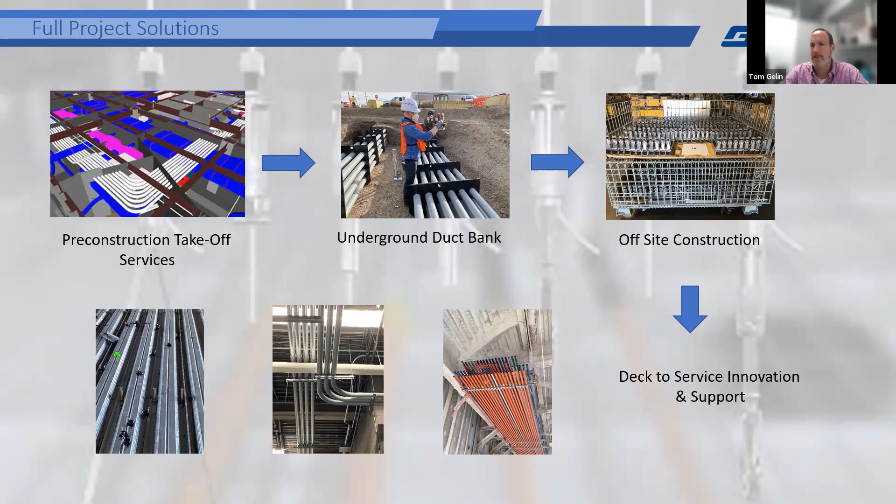How much time does the contractor need for us to be able to turn this around? So when we take a look at that, what we're asking for is your shop drawings. As that design comes through for you guys, and as you're building this process, we can help you with linear foot — we can do bare bones quotes from linear foot, but we do need to talk a little bit about structure. We can get into a 5 to 10 minute conversation about that and walk it through, or we can send those shop drawings in to our team in Chicago, and they can walk through an entire BOM for you and lay it out. As you see up here, everything is color coordinated — each part code for the BOM is color coordinated, then it's laid out on your drawings as well.

So we'll overlay that into what you guys have laid out and designed. It's zone specific. We can also work on delivery schedules for you, so we're shipping just in time rather than dealing with having to stock or hold product. We can deliver just in time rather than having to find a place to put it, because these sites are not getting any bigger. They keep getting smaller and smaller, just like your mechanical spaces. So that's one avenue we provide on that side.

We'll help with the technical side. Go ahead, Tom. It was just more of a comment that this service is available to all of our customers, electrical contractor, mechanical contractor, piping contractor. And I've been surprised at the reception so far that it hasn't been greater. So maybe some of the electrical contractors here will take advantage of it.

One thing that maybe we're not touting enough is that the takeoff service we provide doesn't cost the contractor a thing. That's a free service we provide for looking at the product and the process we're putting together through Gripple. So it's a no-cost takeoff service that's available to you.

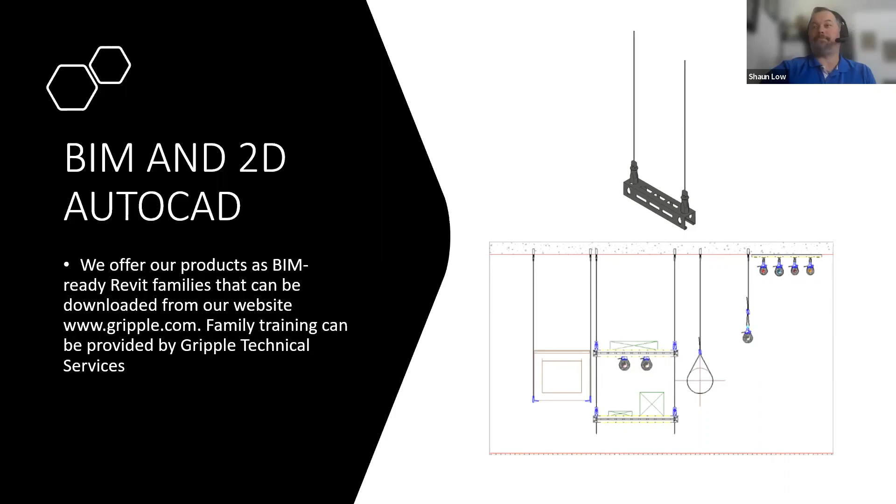Let's dive into the actual process of the products we're talking about. When we get into stepping from the design to site work, this is a big one: the underground buoyancy anchor for anchoring duct bank solutions. It's been pretty straightforward in the market, whether using EMT or threaded rod, bending it over the top, building a frame. But no matter what, you have to find a way to hold that down during the concrete pour. So we've designed an anchor we've been using for years in solar applications, and now we've turned this over thanks to a discussion with the crew in Iowa that started this process for us about how to use it with duct bank.

So what we're doing is providing a single SKU solution that gives you an anchor, 15 feet of cable, and a dynamic lock. We'll actually show you how that works right now.

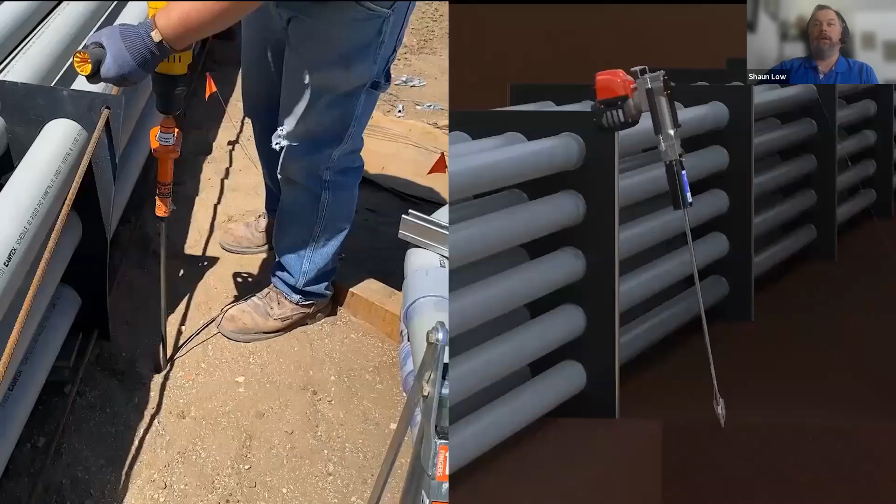The underground buoyancy anchor is driven into the trench at a near vertical angle next to the duct bank spacer or card. The drive rod is inserted into the anchor and used to drive the anchor to a depth of 3 feet.

Once the anchor is at approximately 3 feet, the drive rod is removed from the anchor. The anchor is then set to 90 degrees by using the leverage of the jack jaw to rotate the anchor and lock it in place.

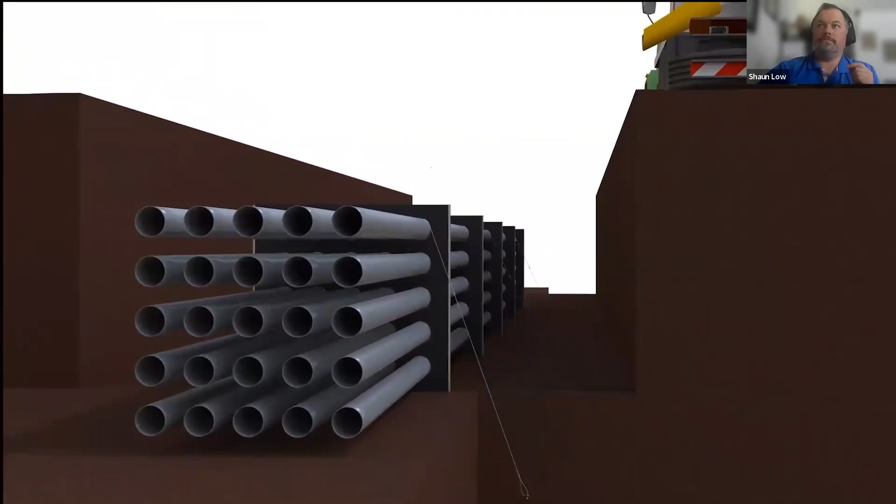Finally, the cable above ground is inserted into the Gripple lock and secured to the duct bank by looping the cable through the spacer and back through the lock. Once the cable is tensioned hand tight, the duct bank is secured and ready for the concrete pour. Contractors are currently using anchors every other card or spacer location, approximately every 8 to 12 feet.

So that's a pretty straightforward solution for anchoring that duct bank. This will depend on your width and height of the duct bank, but we pretty much default to every 10 to 16 feet, every other card location. The installation time was pretty close to what you're seeing, depending on your soil conditions. But if you've got questions, we can come out and do an on-site demonstration for you, and walk you through an actual layout. We shoot that off of linear foot when it comes to it.

This has become extremely popular for the larger sites that we're working on, data centers, battery plants, and so forth. But we also have contractors using this in those smaller, quick 100-foot runs where they need a quick solution to anchor down against concrete churning.

So any questions on that particular product off the get-go? I'll have to see if I can figure out if I can see a raised hand or something like that. Hey, folks that are on, can someone raise their hand? Okay, I see one. All right, Tamara, go ahead and ask. All right, this is all working. All right, we're good. Thanks, everybody.

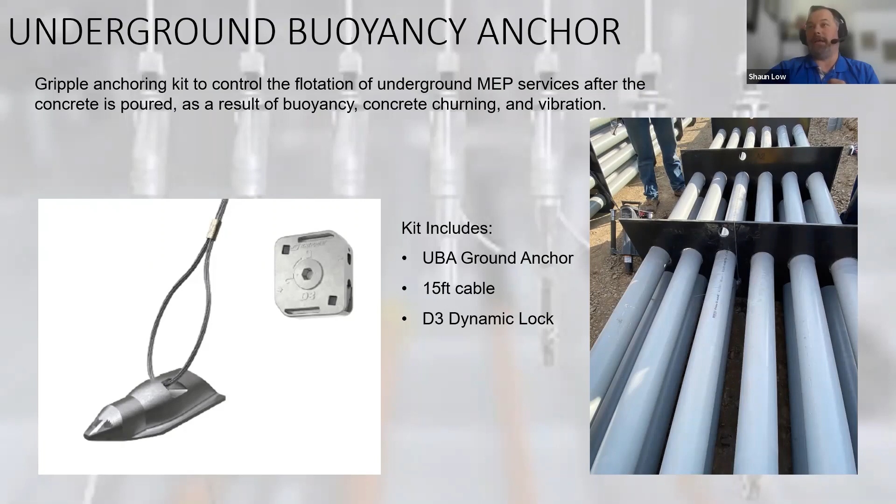So moving from the underground buoyancy anchor, we will move into the cast-in-place side. This is something Tom's seen a little bit of for sure. On the mechanical side, we have an all-in-one cast-in-place concrete insert that is basically going head to head with your Blue Bangers and Wood Knocker solutions.

On the mechanical side, this is really great for us because we're supporting all sorts of different weights. Gripple's got different solutions for different weights, obviously with cable and then even with rod. Not to steal Shaun's thunder here, but it really is a great solution where I don't need this size support device for these spots and this size support device for other spots. We just use the same one over and over. So if it's 100 or 1,000 or 5,000, same one all the way through.

Absolutely. Did I just ruin your mojo, Shaun? Sorry about that, you summed it up beautifully.

Okay, thanks. So the cool part, and this is something that's a little bit unique to electrical contractors, is a lot of times I know for a fact, guys, you're getting those last minute changes. Somebody's adding an additional run or more weight to your basket or another run of conduit and so forth. So you've already got your inserts in the deck, and now all of a sudden you've got that 1/2-inch insert in the deck, but you need a 3/4 for that threaded rod. Well, when you use the spider in either metal deck or wood form, it doesn't matter. We can do 4 sizes of cable hanging and 4 sizes of threaded rod, and let me detail that a little bit further for you.

So let's take a look at an actual installation here in our wood form.

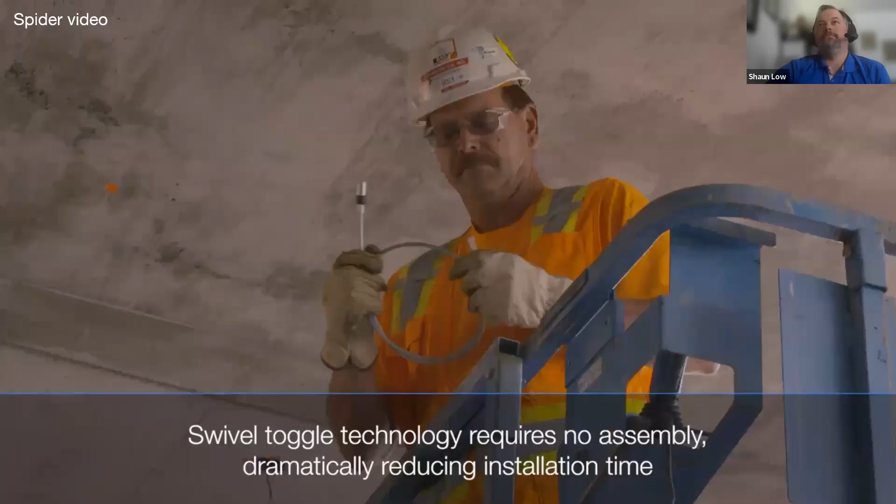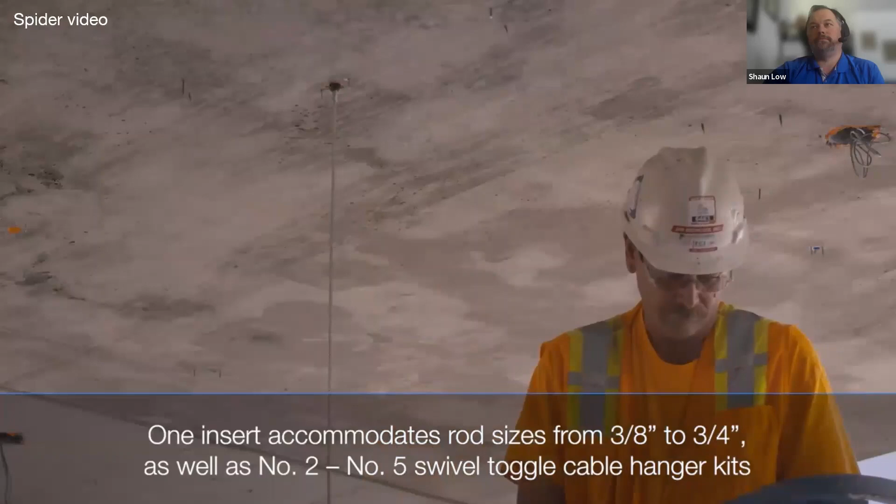So, pretty straightforward, quick install. A quick install like that shows you that it's a quick set, knock loose. You saw the tool for the wood form with the pounding driver.

We also have a full extension for the metal deck version, which let me show you again real quick, where it has the stem at the bottom that actually snaps through the deck. It's a 1-inch hole set that it goes through and just snaps in place.

If you do wish to actually secure with Tek screws, you absolutely can as well, no problem. And then if you have a pan deck - this is that conversation we get into where other parts of the country get confused, because they don't use a lot of wood form or pan form elsewhere. Down the center of the country, however, we will do that. We can actually adjust from a wood form with nails to putting a zip screw in there if need be to work off a pan deck.

So that is our spider product.

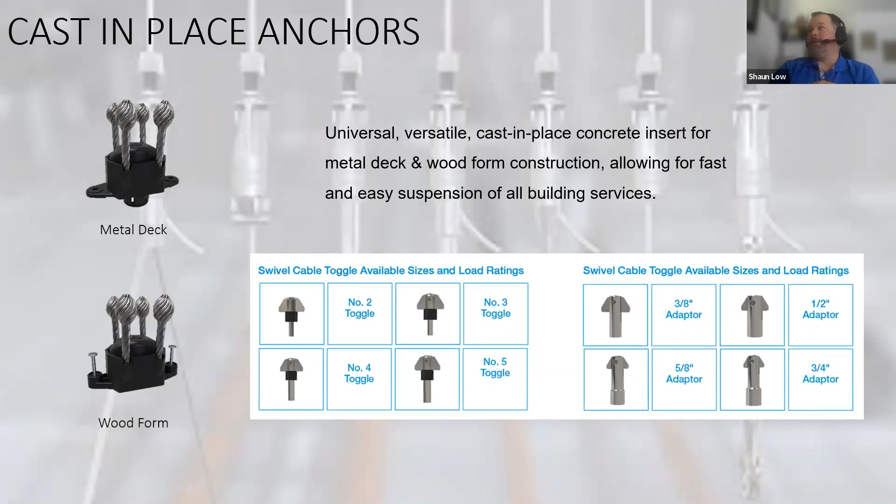Anybody waving hands at us, Tom? Let me just check real quick. No, not right now. All right, you guys are being really easy on me today.

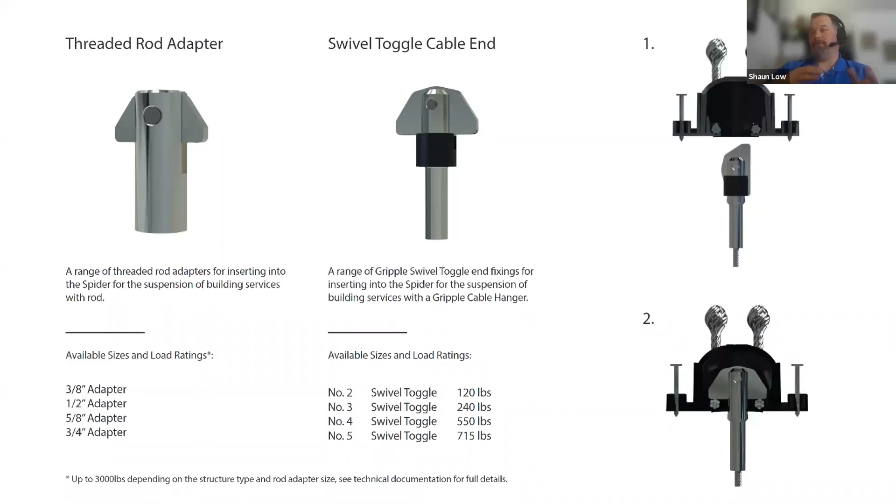So when we talk about what's next for the process, we've covered the underground side of it and we've covered the index solution. The next thing we're going to talk about is what do we do after that, what's the next part of the process. And for Gripple, it's very simple.

We always ask 3 questions of our contractors when it comes to what we're doing. The first thing we ask is, what are we hanging? What's our weight per foot, right? Because we want to talk about what the cable's going to hang.

The next thing we want to talk about is what's at the deck. What are we doing? So if it's not a spider, if we're not able to hang out of a cast-in-place insert, what are we doing at the top end? Are we looping structure? Are we attaching to a beam clamp? Is there something else you need to look at? We can take a look at some of the different end fixings right here.

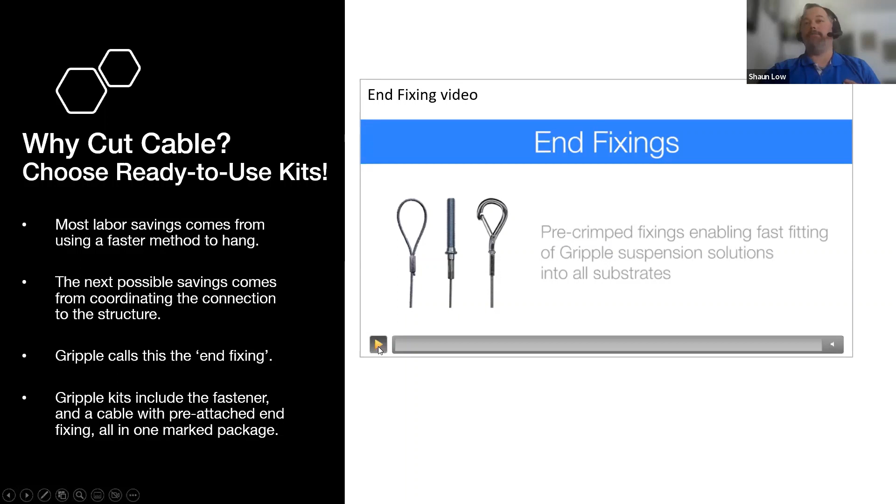Our toggle set - this one's pretty straightforward. I don't know if you need to describe that one much, but right through the beam, snap in place. Snap hook off a beam clamp - much lighter application there, mind you, for the set, and same with the mini hook.

And I think you're kind of getting the impression that we've got a couple of options available. Actually, when it's set to music, this video is sort of mesmerizing - it just goes on and on with all the different ways you can attach to structure. It's kind of cool, maybe I'm just being nerdy, but it really goes, I think it's like 6 minutes to get every fixing covered, and there's probably 20 more that aren't even on there yet.

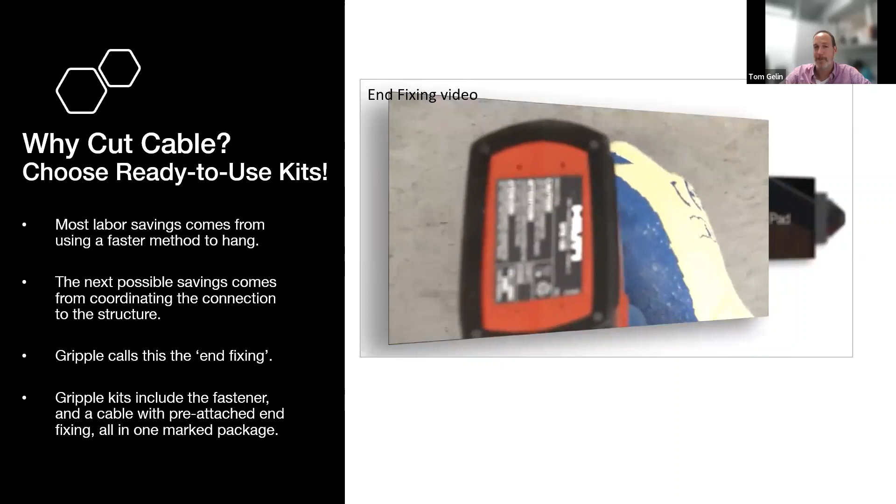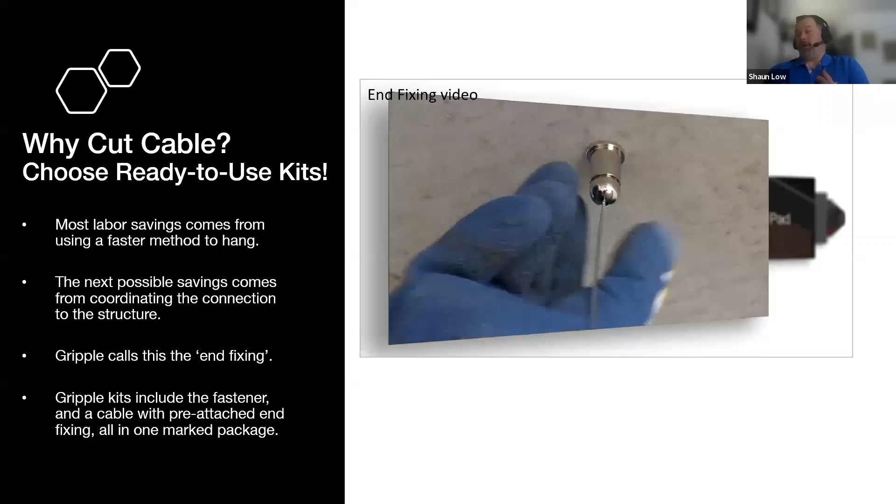Correct. So what we're trying to make sure you guys see is that there is a wide versatility to the products available to you, and it's a 3-minute conversation about what we're talking about. And all of these end fixings will come in multiple sizes.

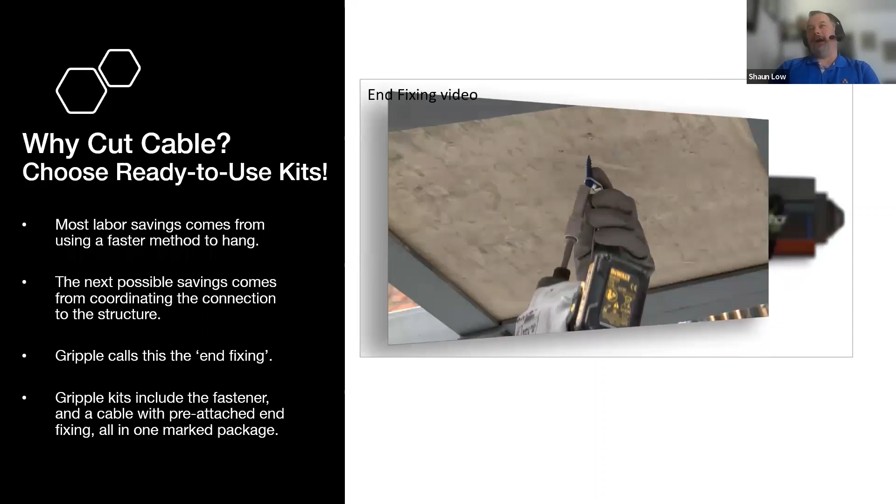We are limited in certain - please ignore this one because this one's a UK version, we don't play with that here on the US side. This is one of our more popular ones, which is the 90 degree. So these are all available, and it's just part of the kit that we're building for you, because everything we put together for you is going to come prepackaged and ready to hang.

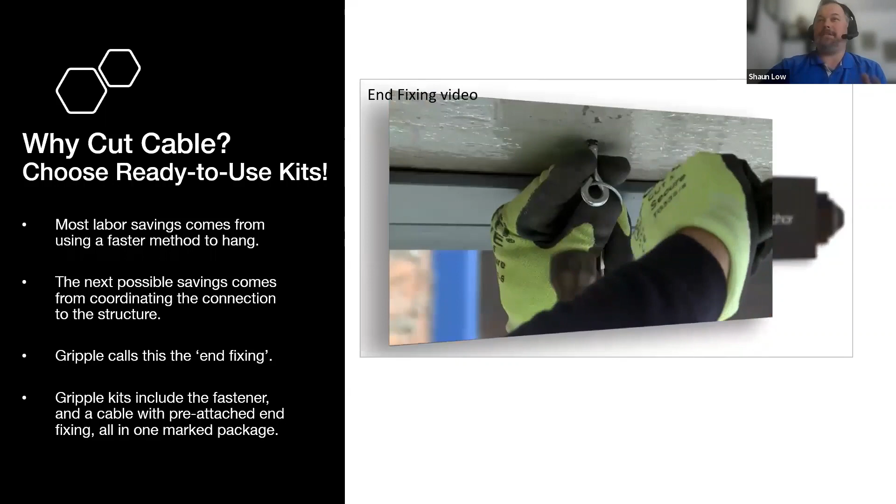So this is our end fixing. This talks about that side of it. And if it's all right, Tom, I'm going to jump to the next page.

Absolutely, absolutely. And this is how we select it, right? So it's just talking about what the selection is, whether it be the stud, the 90 degree, or the loop. Those are the 3 biggest users that we have in the country right now, because with the 90 degree eyelet, you're able to shoot through it, smack through it. You can actually thread through it. The stud works well in either our spider or works into other inserts or a drop in, whatever it happens to be there. So those are all available to you.

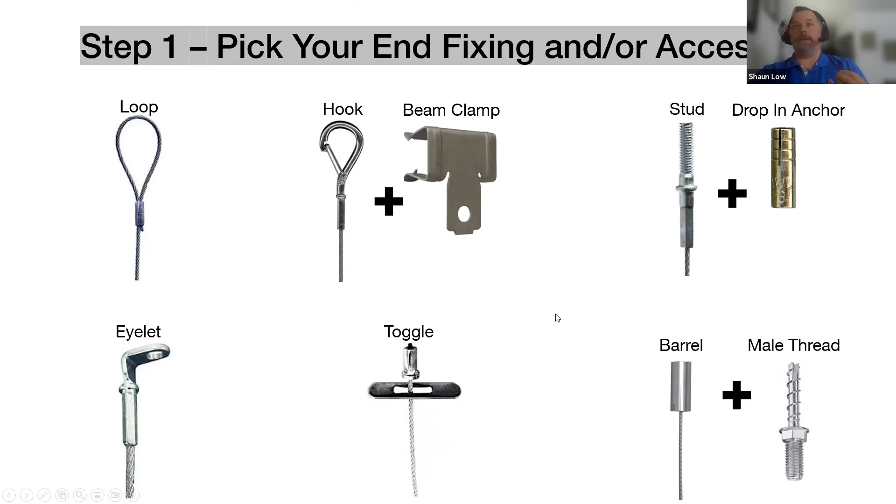The next part of that process is once we discover what we're hanging at the top, knowing what our load is at the hang point. How many hangers do we have? Do we have 2? Do we have 3? Do we have a single drop location? We now want to talk about what your weight is on that process. So we want to talk about what's your load per foot, where's your spacing? Is it 6 foot? Is it 8 foot?

And then we can start calculating what that actual cable size will look like. And it's really straightforward for you. As you can see here, our loads are laid out pretty quickly. And of course, we stock in 5, 10, 15, 20 foot and 30 foot lengths in Chicago. Tom, do you guys go by the standard 10s, right? Yeah, I think we do. Perfect. And that makes it very easy for you.

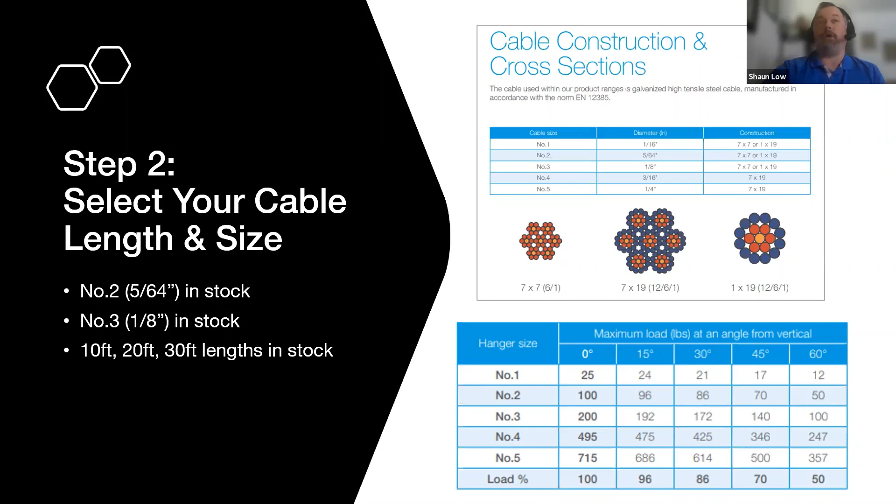So it's a matter of just doing a quick discussion of what's at the top end and what's our load at the bottom. And then what we get into is how do we fasten to the actual service that you're hanging? And that's the next part of this process, which is selecting the fastener that you have.

The product itself will show up just like this in a box. If you're using our number 2 style cable, which is one of our most common, it's 100 hangers per box in a 12 by 12 by 10 box. Very straightforward, very simple, easy. Pull it out, put it in the air.

So let's talk a little bit about those end fixings. Go ahead, Tom. Before we hop on, so Airflow is located in Milwaukee, on the northwest side of town. And we do have, even though Gripple's not so far away in Aurora, Illinois, we do have a fair amount of inventory. It may not match exactly what you need, but at the same time, it very well could. So we do have a lot of cable, a lot of end fixings, a lot of different ways to hold up pipe, and in this case, could be conduit or a tray or whatever that turns out to be.

So if you're interested in knowing what we have, we can easily get you a list. And if you're interested in having some stuff available, it's certainly a conversation that we can have. Usually ordering and shipping out of Aurora is 2 or 3 days. Sometimes that's not exactly fast enough. So we do have some stuff here as well.

Perfect. So let's talk about the service end. What's at the bottom end? And the one that is our most popular within our electrical market is our Unigrip product range, because it ties well into prefabrication and it works exceedingly well in multi-tiered racking solutions. And we'll take a quick look at what is available in this kind of multi-foot solution called the Unigrip.

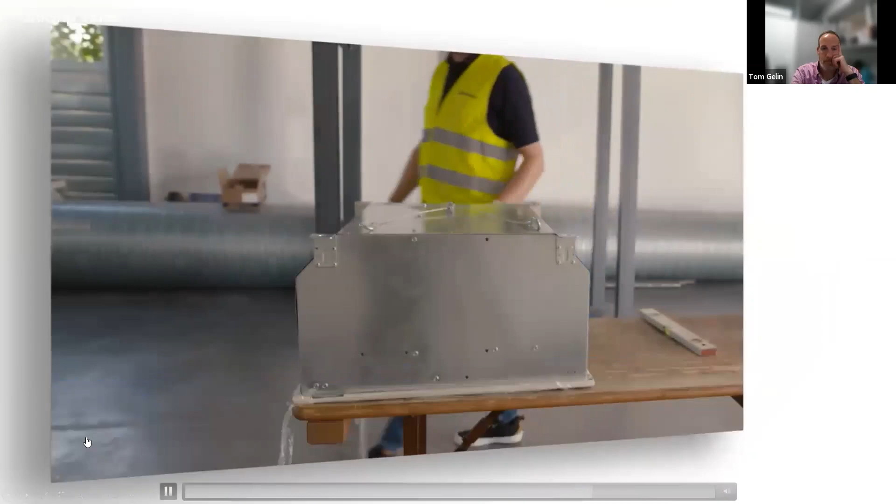I got to say, Shaun, part of the reason that we did this first webinar series, of course, was we were dealing with COVID. But at the same time, like, the people at Gripple really do a bang up job on their videos. For the customers out there, Gripple will come out and they'll do a site visit with Dan or regional, and he'll bring a whole box of different Gripple fastenings. And I think the videos actually do a better job of showcasing the product, just because you're using it versus, like, here it is, ding ding, like a Christmas ornament or something like that.

So I absolutely agree. It's one of those things where, especially when we bring out the kit, it can get overwhelming because of the amount of solutions that we have available. This is why we try and talk a little bit more specific to a job or a specific type of application that you're doing.

With the Unigrip product that you just saw there, we're talking about some of the most common ones, and this is one of the biggest key factors for us: racking solutions with conduit. I love talking about this because we've done hundreds of thousands of these throughout facilities across the country. This design actually came from the Raiders Stadium, where we were doing top and bottom on back-to-back unistrut.

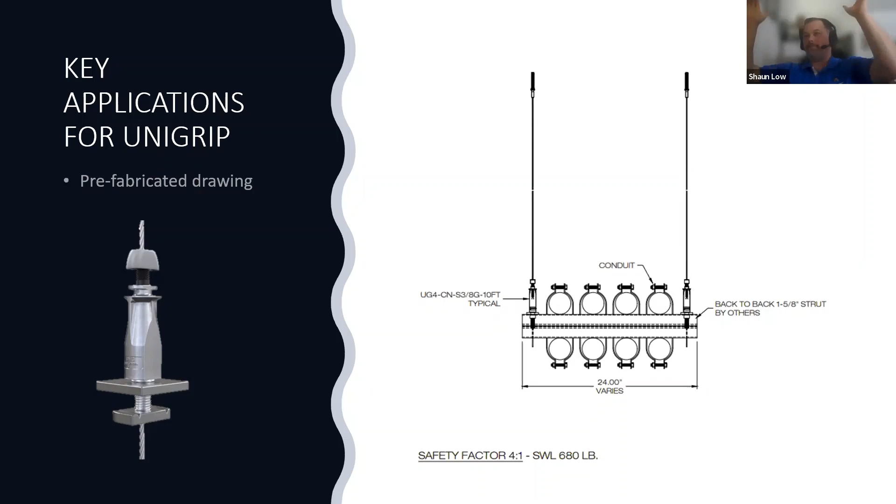This is a real straightforward solution, right? It's very familiar: channel, nut, washer. What we were doing was prefabricating that to the strut before it got to site, and the cable itself was sent to site before the racks actually arrived. So the installation of the cable was already hung. All they had to do was bring the racks up onto the cable, insert the cable, lift them into place, and level them. Very slick, very straightforward.

But the Unigrip center exit is our number one application for prefabrication and for rack solutions. It's really simple, really straightforward. You can use it for conduit, you can use it for basket. Again, it's about the load, right? What are we talking for the load on that?

Just to slow it down a half a step, because I remember looking at this—can you go back one slide, Shaun? Sure, sorry. So the product on the left, that's the Unigrip, and whether it just fishes straight through or exits out the side is just whether or not you're attaching to something that's got a flat bottom, or whether you can fish it straight through. But the product itself, with I guess it's the rubber top that tightens onto the cable, that's the Unigrip.

So the body itself—you'll see that in this area, I don't know if you can see my mouse—this is where the actual locking device is within the operation. This here is just your release catch. Large button on top, easy to use with gloved fingers. You push that down, you're able to slide it up or down the cable in either direction. You can tighten it all the way down so it won't go in either direction. But the mechanism that's holding the cable in place is actually within the body itself.

You're going to have a plastic top here, which is plenum rated. Everything is set to go. Here's the thing: the best part is that in any situation we're dealing with, this thing locks in place and doesn't move. That's the cool part—it's designed to hold itself in place rather than have any issues that way. So just a thought for you going forward.

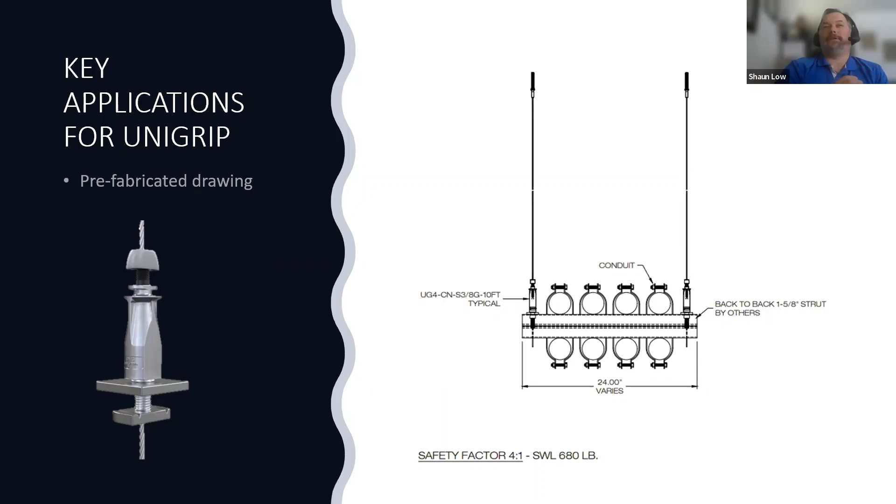Anything else you got there, Tom, or do you want me to jump ahead? No, it's just one of those Gripple things where you guys have interesting names for the product, and I'm like, what does this thing do? Right, so I just wanted you to take a half a second and explain how that works.

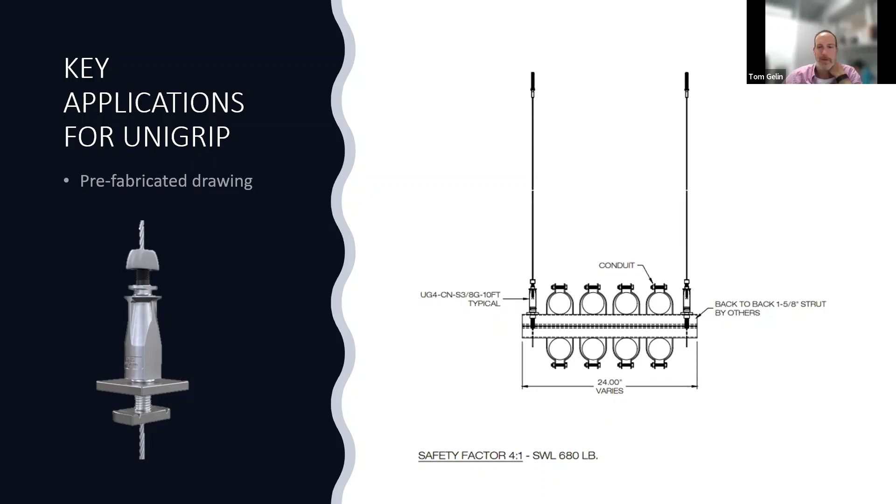Perfect. So the product itself, again, load factors is where we're at right now. Our number 2 cable, which is one of our most common, is 120 pounds. Number 3 is 240, and then we get into 550 for our number 4. Next, and this is one I've been pushing for about 4 years, especially in the electrical market, is our number 5 Unigrip—this thing is probably bigger than my fist total, but it will be an 800-pound load at a 5-to-1 safety factor. So almost all of our product have a 5-to-1 safety factor. Our working load on that will be 800 pounds, which gives you 1,600 pounds across the rack.

If you're doing a center exit, that means we can do 1,600 pounds across multi-tiered rack, going across, because it works off of the cable dimension and load for the cable at that point. It's an impressive feat. I'm really happy for it, because it's one of those things we're seeing more and more of—they're not putting any less wire on these baskets anymore, or through the conduit. It just keeps getting more and more.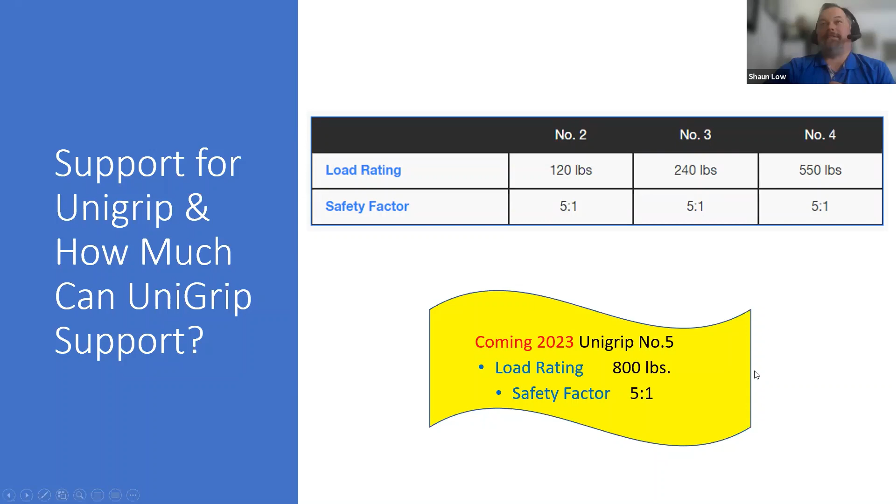I'm going to take just a half a second on this, because this was another thing that confused me. On the left versus on the right is Unistrut, right? That everybody uses. And on the left, the product looks like Unistrut, but it's actually not Unistrut. It's a Gripple product, and we're going to be talking about that.

The benefit of using that Gripple product is this Unigrip just has a quarter turn and snaps in place. So it's again a little more tinker toy than it is a Erector set. On the right, you have to use this little plastic insert to hold. I mean, look, if you love Unistrut, by all means, use Unistrut.

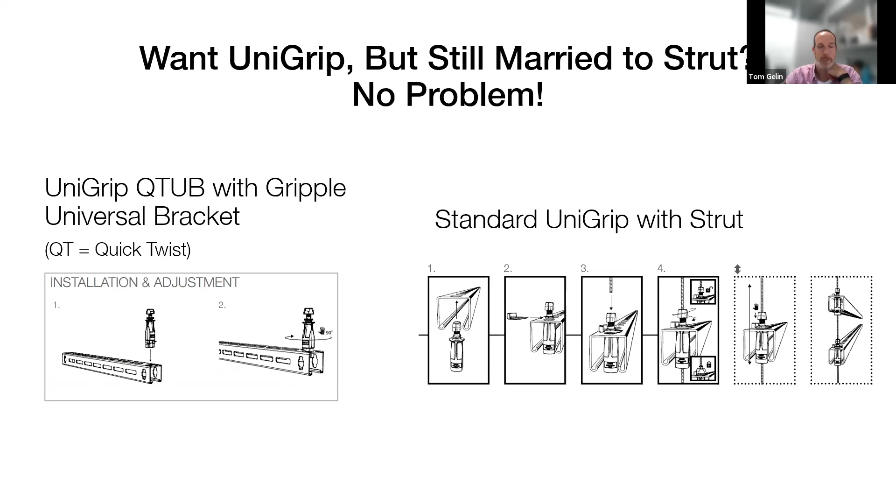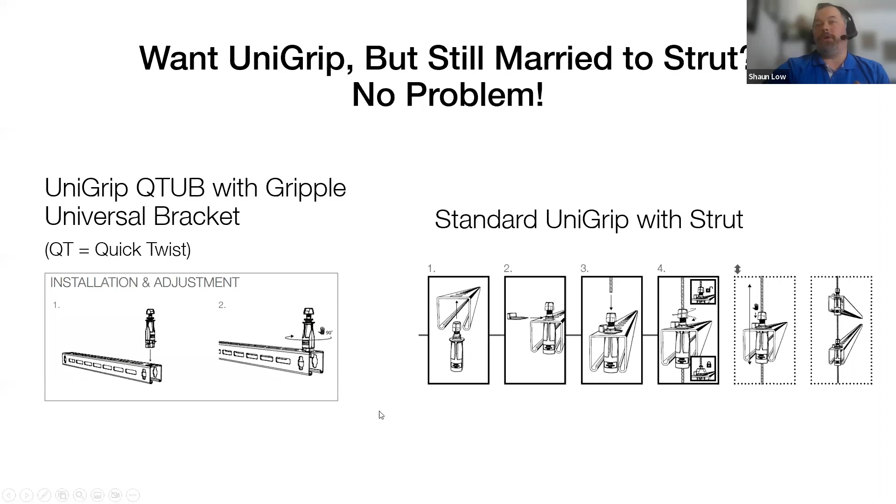But there's some cool stuff you can do by rotating the Gripple strut, I guess is what we're going to call it. So yeah, slightly different. We'll talk about the differences between the Gripple strut and the standard Unistrut in just a moment, but it just gives you some more flexibility. Like Tom was talking about, it's more tools for the toolbox, just giving you more options of what you can use in the field and give you some flexibility.

And it's compatible with all current Unistrut products that you're using for clamping, whether it be Cobra clamps or Cush clamps, whatever it is that you're using in those situations. Or you can use our quick twist solutions, which we'll discuss here in just a minute as well. Like Tom was talking about, that quarter turn quick twist is a fantastic solution that requires very little manipulation to actually make it happen. As you saw in the video, it's just a quick wrench, just that quarter turn to secure it in place.

So the big thing is going head to head on the material side is how much time does it take for you guys to assemble your traditional Unistrut lengths. The other side of it is maybe we don't have a 13-inch version that you would use, we would have a 16-inch version. And so that's where the discussion comes in about what works best for you. Whether it's Unistrut, I'm not going to fight you on Unistrut. We want to give you another option on the table with something that's available to you that's pre-cut and ready to go right now.

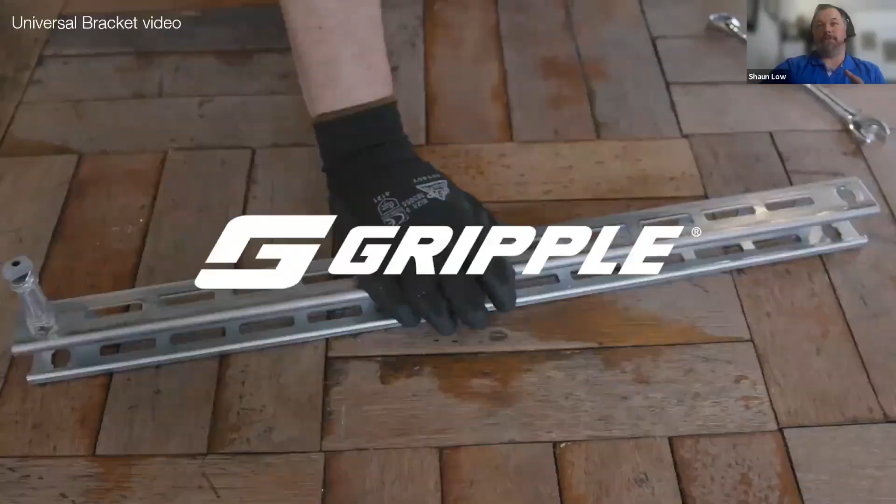So that gives you a look at the Gripple strut. The other side of it is that with the Gripple strut and our fast track solutions, we're talking about saving space and time on site. So let's take a look at what we mean by looking at the universal bracket. Now, this is specifically our pre-cut bracket and how it can be used in your application.

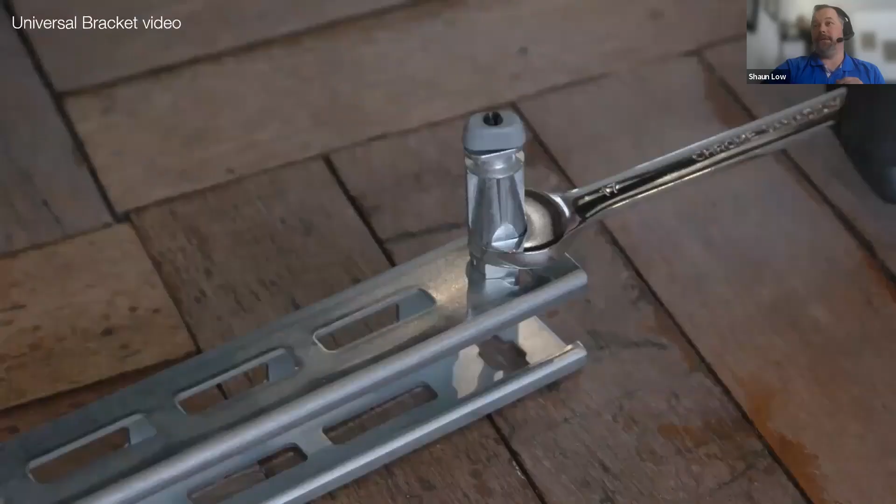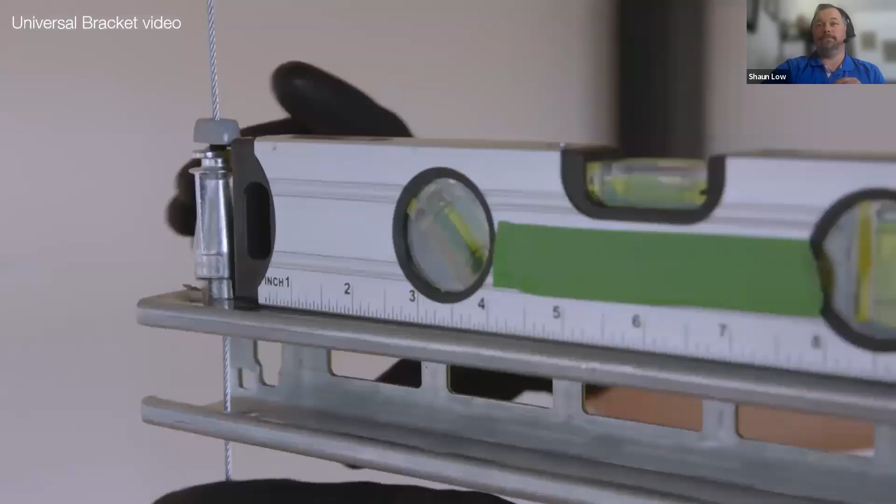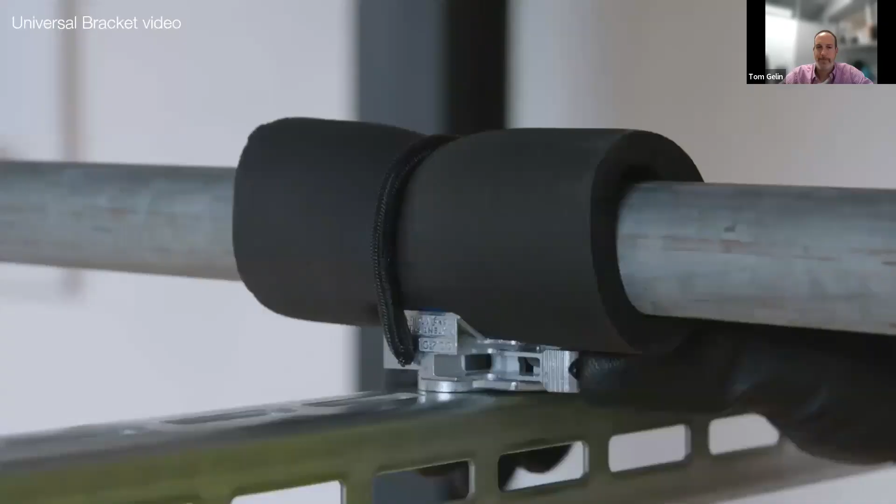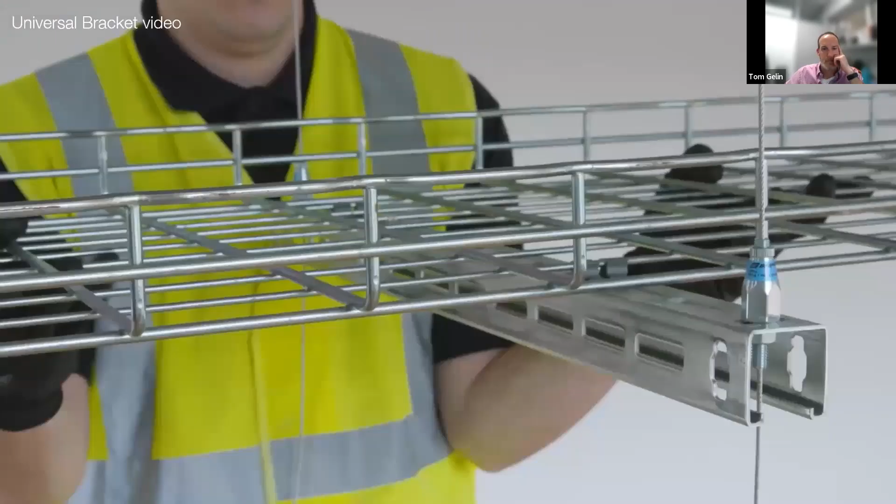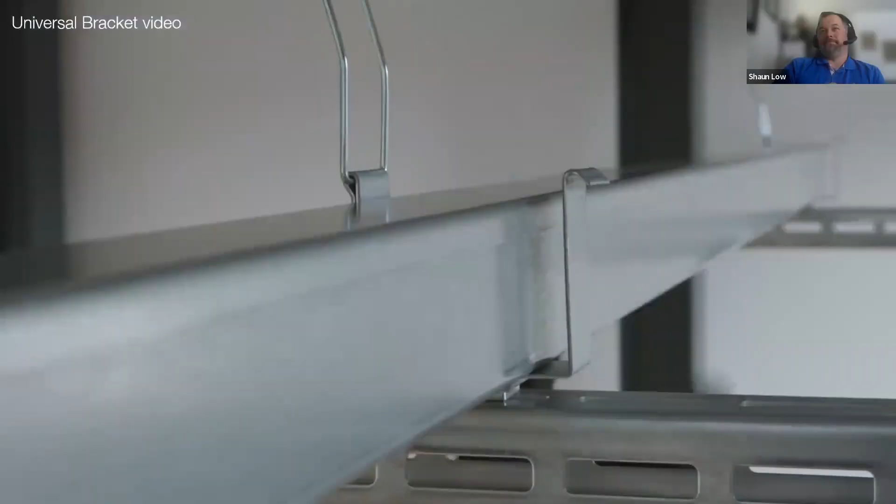Doesn't get much easier than to carry in your basket. Don't see a lot of trunking places here in the US, but it's an option to have.

Sorry Shaun, you're breaking up a little bit. Sorry.

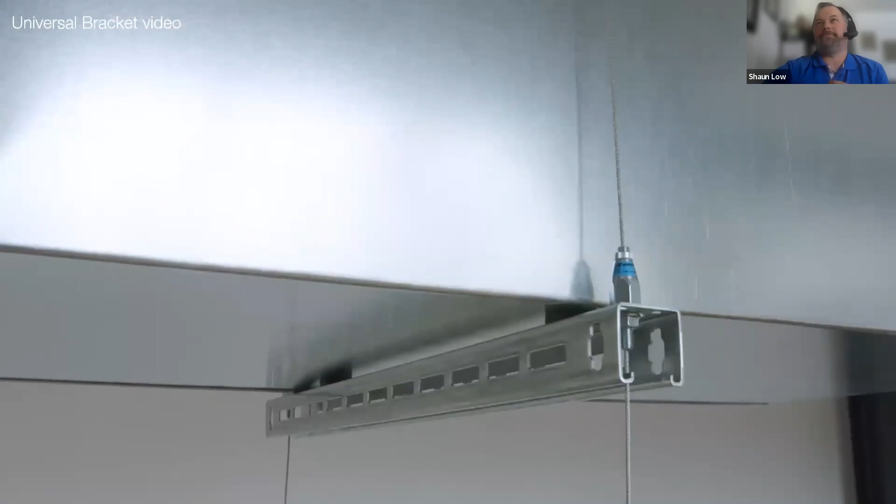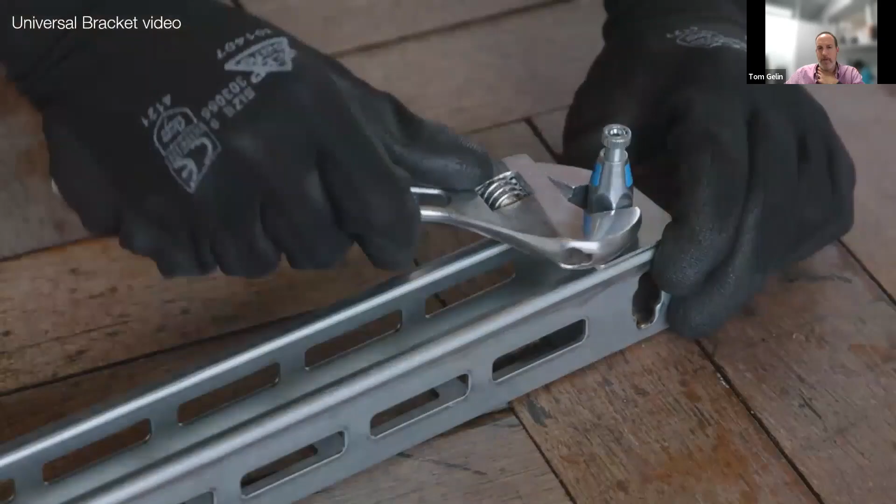Shaun, is that fitting in the end different than the mechanical one? It's just shaped a little bit differently than the one that has the plastic top. Is there a reason for that?

Yeah, so what you saw there is our Gen 2 trapeze product. It's a little bit older, that's a full metal solution. In the European world, they require a fire resistant, 100% fire rated product, which is all metal. Ours, on the other hand, is a ceramic. The one we have for Unigrip is a ceramic version on the inside, which actually meets all of our code and building standards here in the U.S. as well. So we do have both options available. That one's just, we don't need the all metal.

Correct. Yep. The difference between the UK and the US is here in the US we actually require fire suppression in buildings. In the UK, they do not. So all of their hangers and everything like that are required to be fully metal solutions because they don't have sprinkler systems. They're coming around to that though. So that gives you some flexibility on those options.

As you saw, the clamp solutions available are the compact QT and the standard QT, which is the adjustable height QT. The compact is our most common that we're seeing guys using in the electrical market. It handles everything from 1/2 inch all the way up to 6 inch on that pad. It can be hung below or above. If it's hung below, it's 170 pounds. If it's hung above, it's the rack that it's on that holds the load.

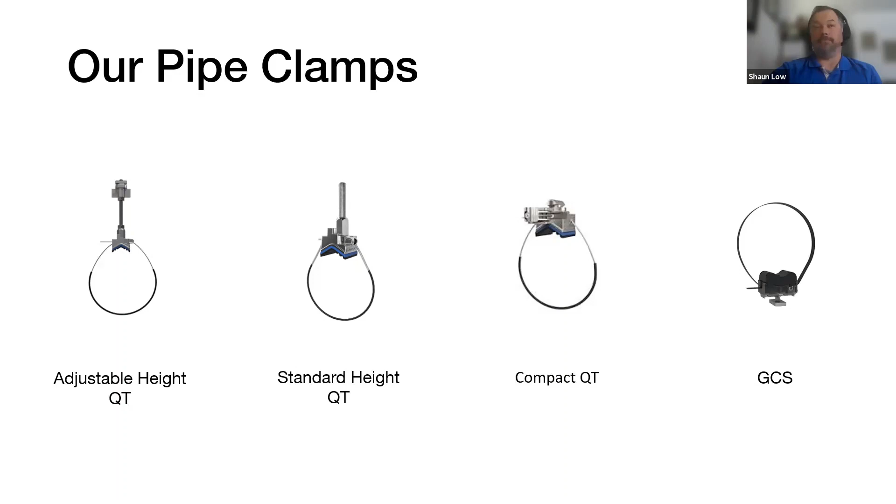We also have the GCS clamp, which works with traditional strut. It's a Gripple clamp for strut. It also handles, in the electrical configuration, 1/2 inch up to 9 inch. Obviously we don't need 9 inch, only up to about 4 inches is what you guys are ever going to use on those. So that's our quick connects for clamping conduit.

Here's another quick look at it. This is what our kit looks like. We can do a quick video on this if you guys want to take a look at it. Tom, what do you think? How long is it, like a minute?

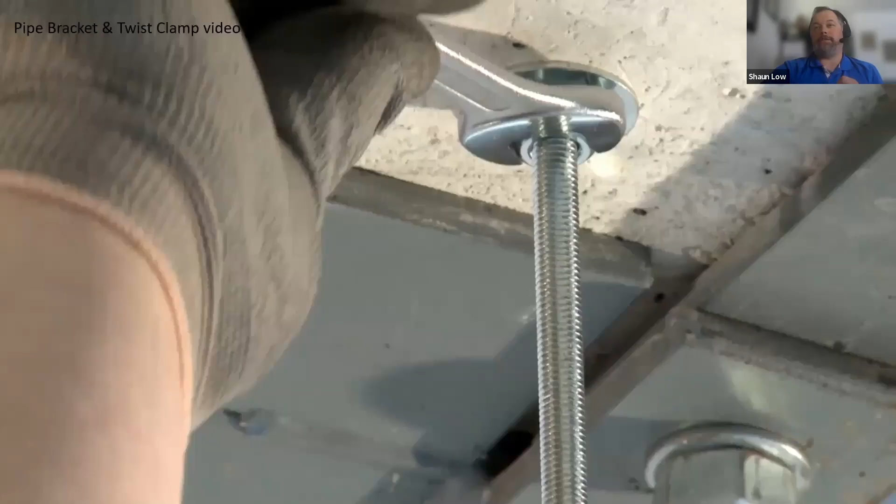Go ahead, okay. Very similar to what we did. Just those threaded rod guys. Yep.

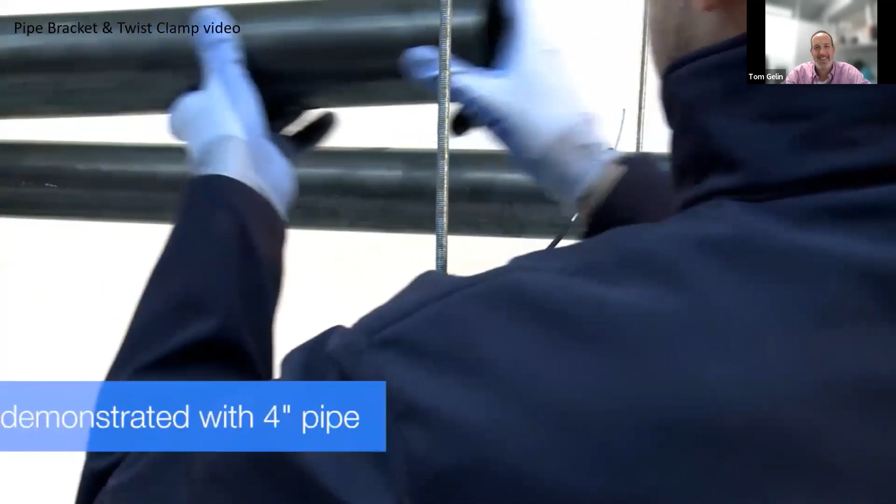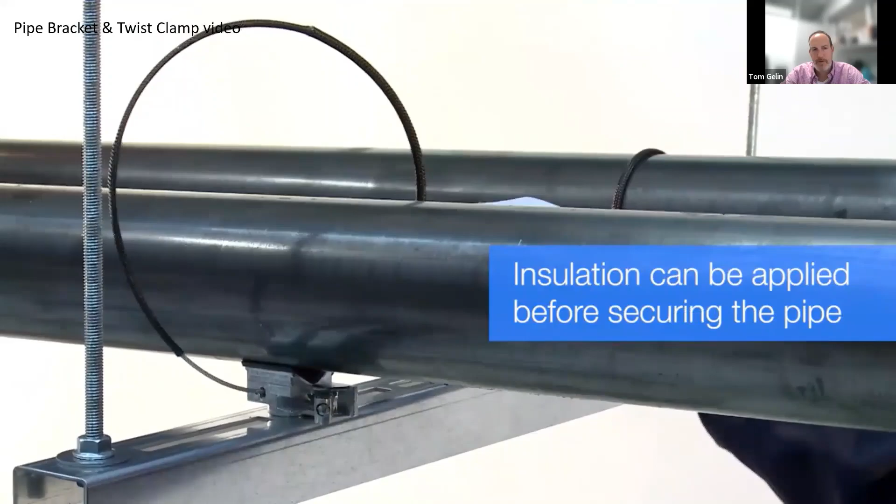All those clamps have the jacket on the cable. They do, yep. And that was more...

Actually, before we dive into this, I'll show you this here in a second. But what Tom's talking about is this dissimilar metals tube that we have on here, and that's more specifically because this is a galvanized zinc cable that we're using. So that is more in tune for worrying about what the pipe fitters are doing to make sure there's no dissimilar metals. We don't have that issue when we're talking about a metal piece of EMT. You can have it on, it doesn't affect its UL listing if you have it off either. So I do recommend just leaving it as is, it's less playing around with it.

So this unique application is something that may get some interest on the riser side for guys coming out of boxes and stuff going vertical. Take a quick look at this one.

So this gives you some looks on some different applications, that full riser set up the wall. Again, that bracket that's there comes in 9 inch all the way up to 5 foot width, just like our universal bracket or Gripple strut does.

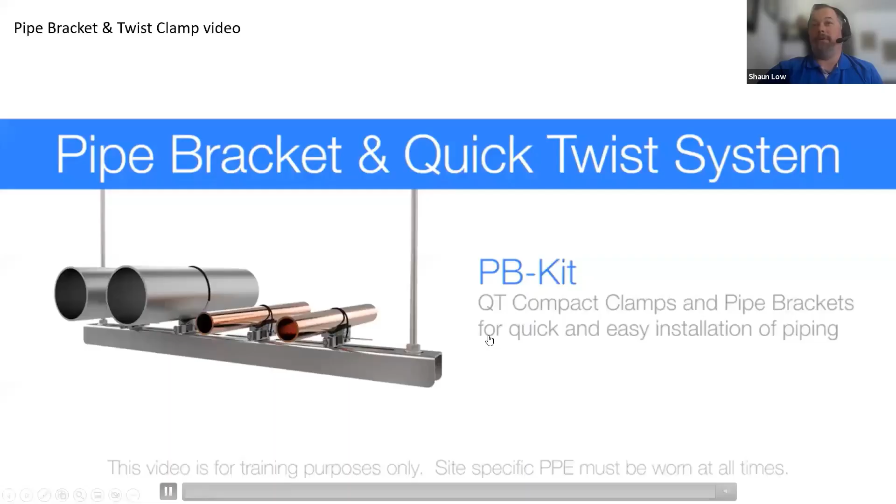It's a perfect lead into falling back to our Fast Trak, because that's the next generation product of the universal bracket and the Gripple strut. This is taking what we're doing with that to a different level on the short drop solutions. So that's kind of a unique situation.

This is a very unique product to us, a little more rigid because we're not using cable in this, but we're doing a very short drop solution. These legs here, the ladders, come up into every 9 inches all the way up to 5 foot in the vertical from the deck, so you can drop all the way down to 5 foot. The same with the bracket, just like the universal bracket or Gripple strut, it comes in that 9 inch to 5 foot width.

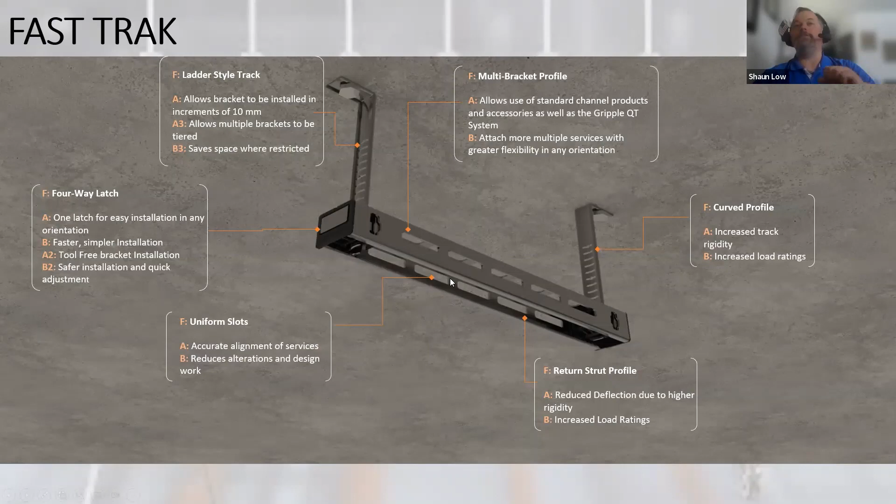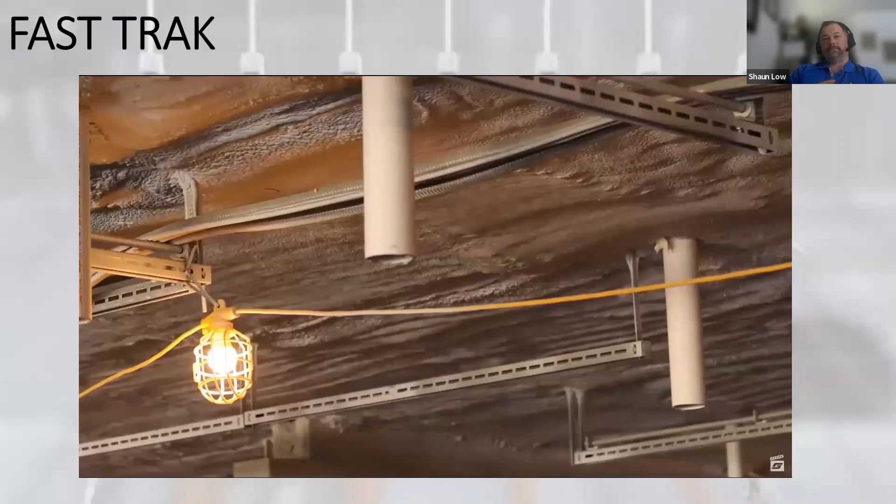This is 55 Romney Street in Charleston, South Carolina. It's an 8-story condominium building being built right now behind us. As of right now, we're working with Owen Electric, who has purchased the Fast Trak and our Fast Trak tracks, to hang some MC, some metallic conduit, in the parking garage area.

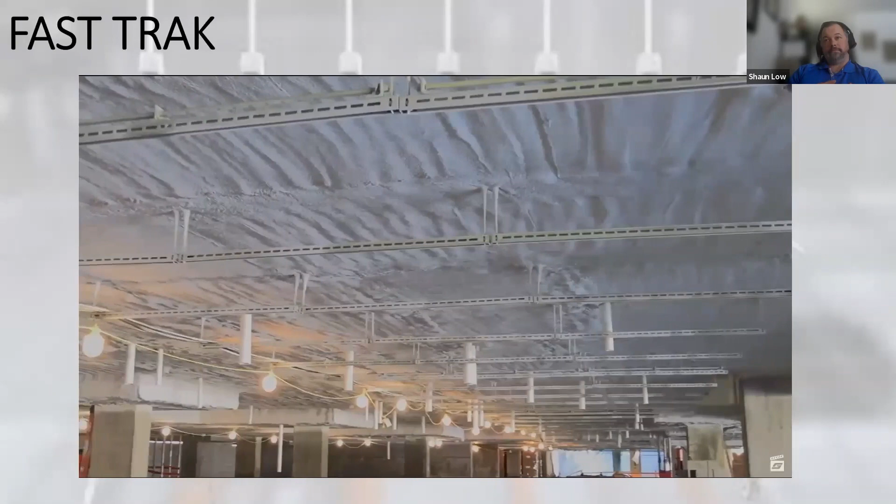Gripple was chosen on this job because of the huge labor savings I saw, the opportunities with the labor shortages, and the ability to get the job done with less people. The biggest benefits for using Gripple as opposed to rod and strut are labor and safety. You're not using as many tools, you're not pulling out saws and files and bandsaws.

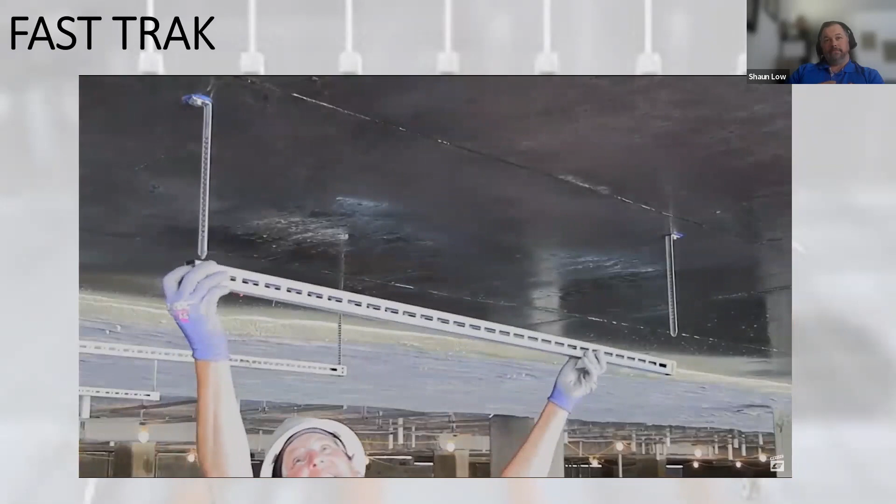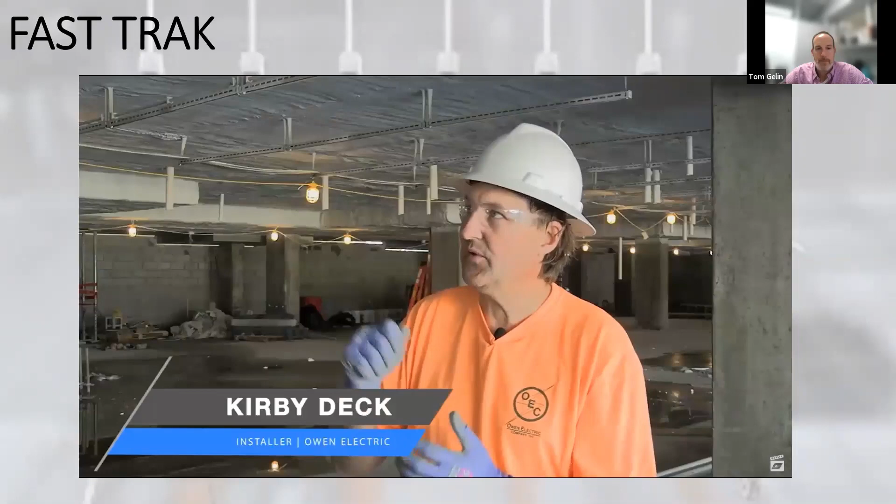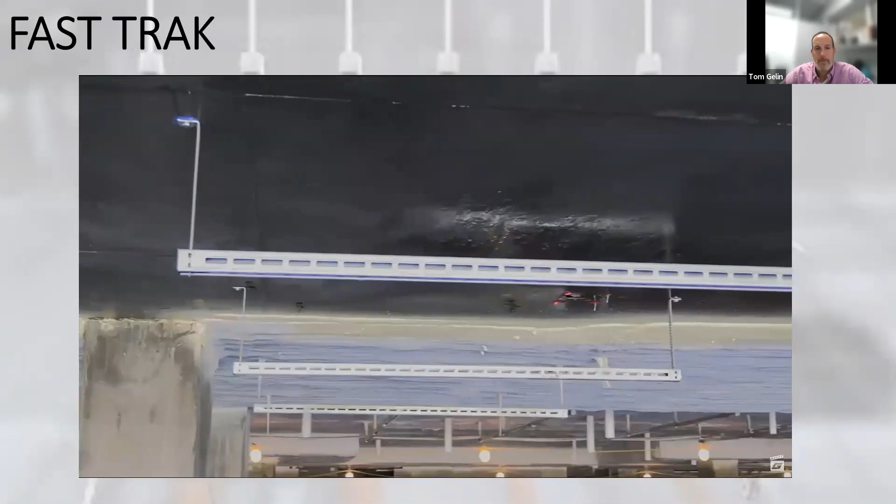What's beneficial about using Fast Trak over traditional methods is, one, we're not cutting any strut. Ours is already pre-cut to length. We're not using any threaded rod and having to cut and deburr that as well. What we do is just take a regular 1¼ bolt and screw in the track on both sides, and then the bar just snaps on. It's a lot faster installation. It doesn't take as many man hours to do, and it just snaps together so quickly.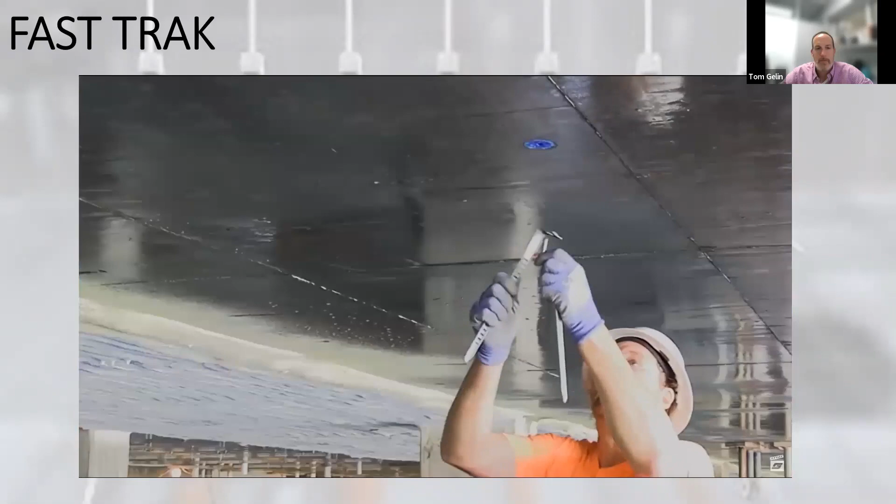Dave was able to look at it and say, okay, for every 5th bracket, we're going to fabricate a roller, so when we pull our conduit, it'll make it easier to roll across the brackets. Things like that, and then utilizing one insert for 2 of our tracks, doing that together — that again was Owen's idea, and that comes from their field expertise.

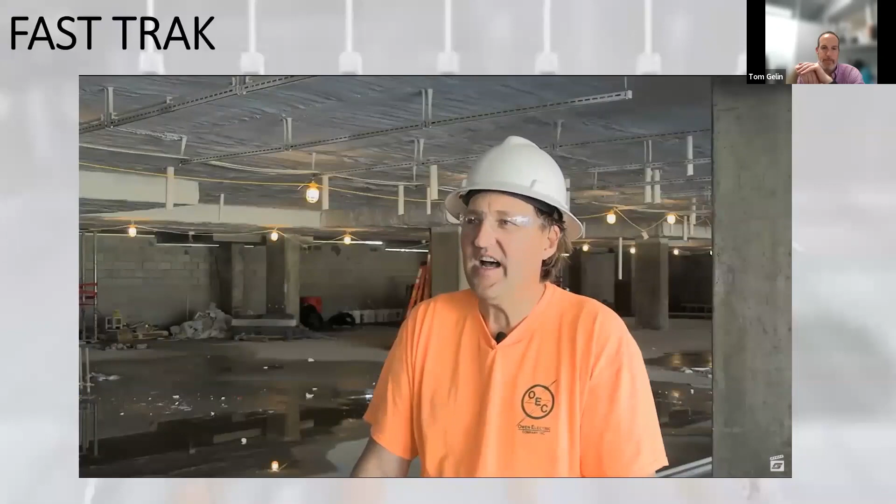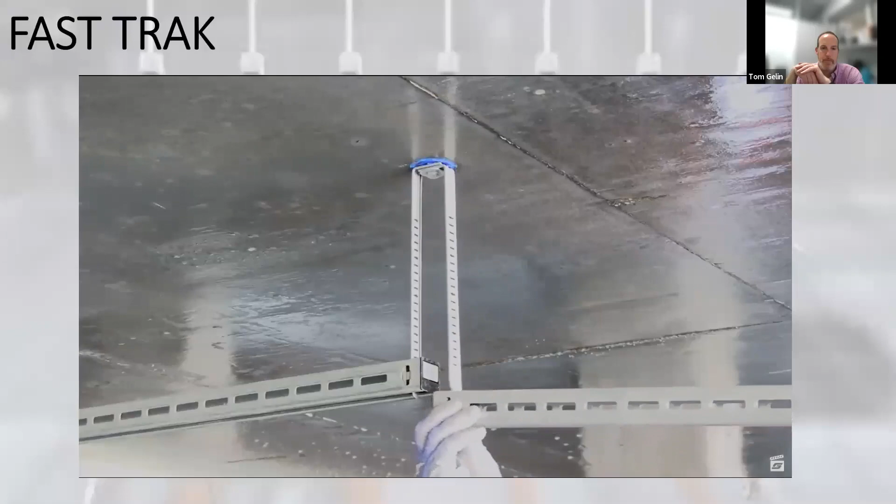I would tell other contractors to definitely use this. It goes a lot faster, it takes a whole lot less time, and would save time and money. I would say to other contractors considering Gripple Fast Trak, you have to think outside the box. You have to find ways to be innovative, whether in your own method or through a company like Gripple. This product is fantastic, and I would recommend it to anybody.

Sound like they're from New York. And yes, that is Spud's name — that is his actual name.

So for you guys, as to what they were doing there when they ran the MC over top of the Fast Trak — once they had completed their run across the length of the building, they were taking that Fast Trak and cinching it as tight to the deck as they could get, literally pulling it completely out of the way, using up as much of that space as possible to get to the top. So they were pulling all their power directly out of the way. It was a really fast solution.

In fact, I've got 3 projects going here in Minneapolis doing the exact same process since they saw that video. So it's become kind of a quick hitter for us, especially for MC, but it's also huge for basket. You can even do conduit with that solution as well.

And just to be clear, for that Fast Trak, you can use all those little quick twist fasteners — the video didn't show it, but your picture right here shows it. So in that particular video, what they were doing was literally just laying the MC on the Fast Trak itself; they didn't have to secure it in that situation. But if you do have the option, you can put clamps on, and you can connect with basket just like you're doing here.

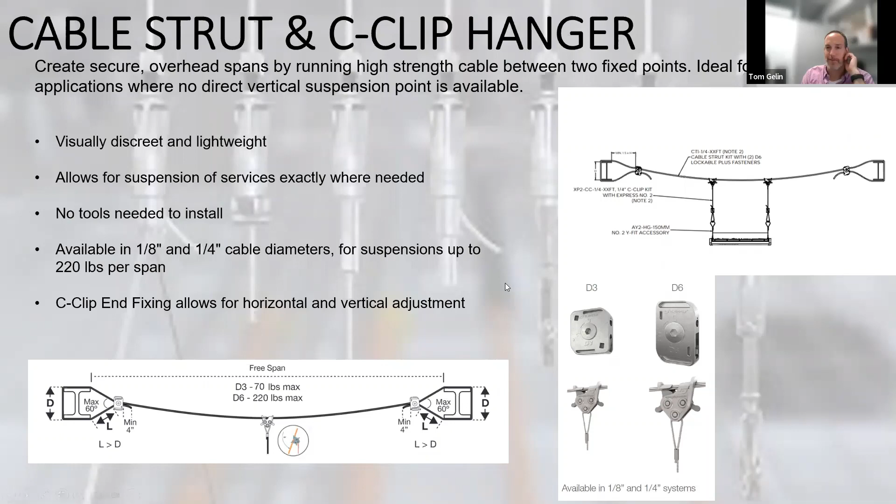Absolutely, so that's cable strut. As you see here, a couple of notes - lighting here, we've got some basket hung off it with unistrut as well, and we just ran a dual line. Then we've also got lighting below on a rack system below there.

The other part about it is that for those of you with architects that get a little antsy about what's being seen, with our cable solutions, a lot of times you get about 15, 20 feet away and everything looks like it's floating. It's a very unique solution that way for you. So there's your cable strut.

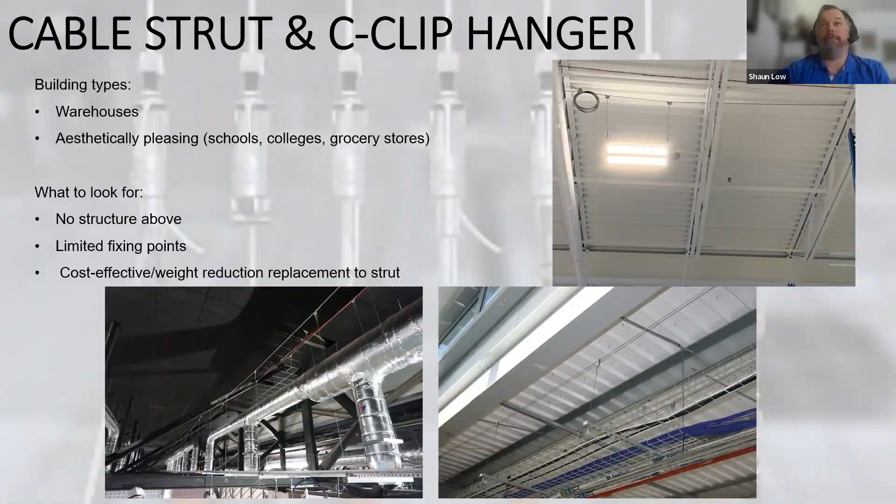So a couple of notes I want to make sure you guys know - everything you've seen here today meets NEC and NFPA 70. All of our UL listings, any product we're bringing to the table has already been tested and approved and is ready to go.

If there are any questions and you guys are looking to use a product and perhaps your engineer is not familiar with it, get us involved. That's our job - let us have the conversation with the engineer. You show the interest and we'll help out with the submittal side of it. We'll have conversations if they have questions. That's our job, let us take care of that for you.

And any product that we have is listed at master spec. And of course, we are Build America Buy American Act compliant because we are manufacturing and assembling in Chicago.

So, what's our next steps, Tom? Well, there's a few things you can do. This is like a...

This is a taste test, right, to see your interest. But if you'd like, we and Gripple can come to your office and bring the samples so you can get your hands on them. Often it's preferable to do it on a job site, if you have a foreman who wants to talk about it because his job's a little different. We can go to the job site and bring those samples.

If you want to come here and see what our inventory is like, check out our auditorium or conference room, we can certainly have a meeting here. We do have plenty of stuff to show. And finally, if you're really ambitious, there's a great showroom, hands-on demos, all that kind of stuff, if you're willing to take a ride with us down to Aurora, Illinois. We can do some hands-on stuff and have dinner as well.

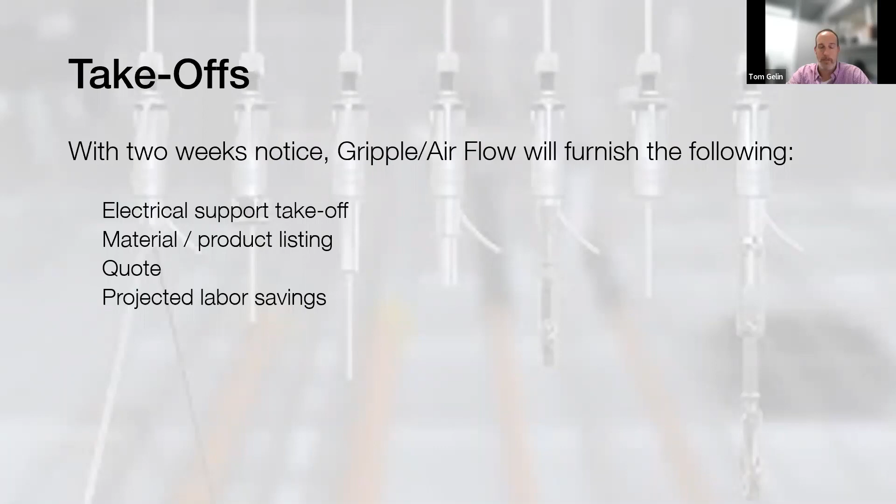For the short term, a lot of people at Airflow can help you, but Ryan Post is going to be our lead person. I would definitely encourage you guys to just send a plan over and we'll do a takeoff for you. Just give us a couple of weeks and we'll get it worked out.

And finally, our lead people here are going to be me and Ryan Post. If you guys want to take a half second and snip this page, you can always reach out to Shaun and Dan. Usually our calls are in conjunction with the folks at Gripple, and it's always nice to have support. Dan Majeski, who handles both mechanical and electrical and basically all trades, lives here in Milwaukee.

So he's at our disposal. And Shaun, if something really important comes up, we'll make him get in his car and drive down from the Twin Cities and go visit the job site. So this is the team, and we'd love to be able to help you out. So give us a shot.

I think certainly Gripple on its own speaks for itself. But Airflow has been around for, actually next year will be 50 years. We have 50 lines of HVAC stuff, and we have a handful of electrical things like starters and electric heat that sometimes cross over between mechanical and electrical trades. We'd love to help you out with Gripple. We're not your regular Viking Electric or whoever you're usually going to, but give us a shot.